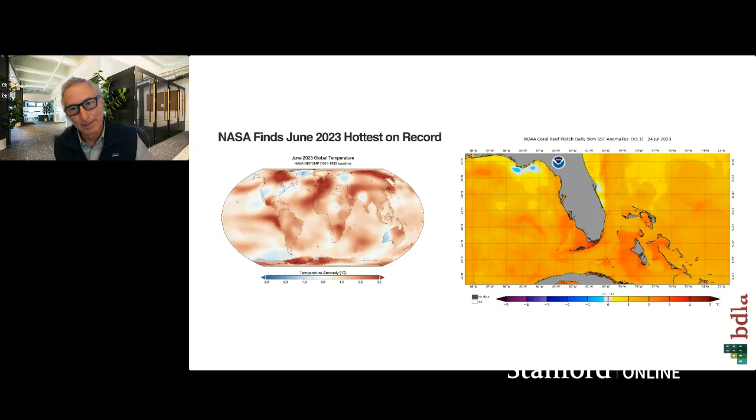The thing about building decarbonization, we all know why it's imperative that we start focusing on this. We're seeing a lot of evidence of climate change, some of it dramatic. But I think some of the other reasons why decarbonization matters is that air quality is impacted heavily by the use of fossil fuels. Particles, NOx, SOx, all these different things are part of air pollution caused by the use of fossil fuels.

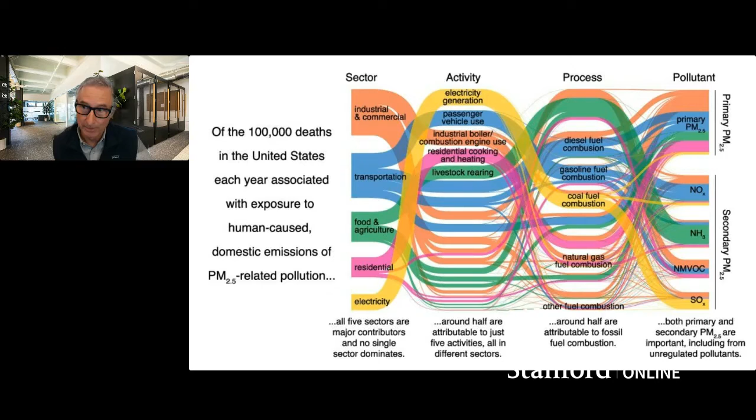The other thing to understand is that fossil fuels do disproportionately impact people of color. Black children in the US are 10 times more likely to get asthma than white children. Most of that has to do with fence line communities living near fossil fuel processing and extraction facilities.

I think the other thing that's really interesting is that the cost of our gas infrastructure is increasing rapidly. Right now, the spending on maintaining the gas infrastructure has gone up by 300% in the last 10 years, plus or minus, and that's only going to increase over time. Most of the gas infrastructure in the US is over 50 years old, much of it 100 years old, and it's going to cost a lot of money to keep that gas infrastructure going.

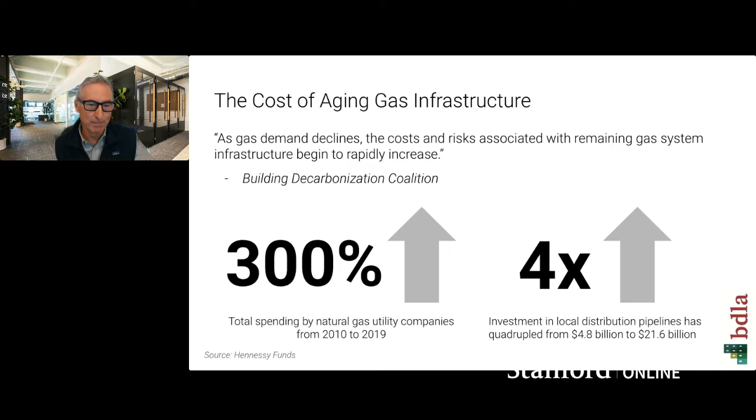So there's a lot of reasons that we should be talking about decarbonization. And I imagine many of you are part of the building industry, and we do play an important role. Buildings account for roughly 40% of greenhouse gas emissions globally, and the number in the US is also very similar. Within that, there's both the operational side and the construction side, and we'll talk about those.

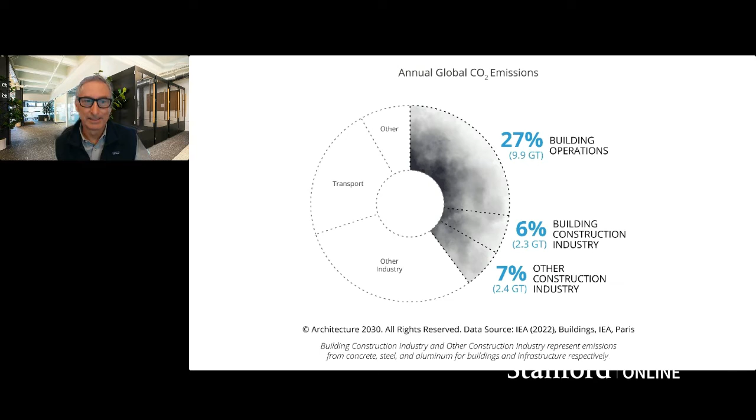I think the thing that's exciting and a challenge for all of us is there's a lot of legislation now being passed and a lot of activity that's changing how we think about buildings. New York City, for example, now has their Local Law 97 for buildings over 25,000 square feet. They have to meet energy efficiency and greenhouse gas emissions limits, and some of those are going to be somewhat strict when we get to 2030.

In California, there's a wide variety of legislation getting passed around this. I think one of the more important ones is SB 100, which says by 2045, 100% of electricity needs to be carbon free in California. It's also interesting that Texas is the state with the largest amount of renewable energy in the US, at 59 gigawatts and growing rapidly, and there's a variety of legislation happening in Texas as well.

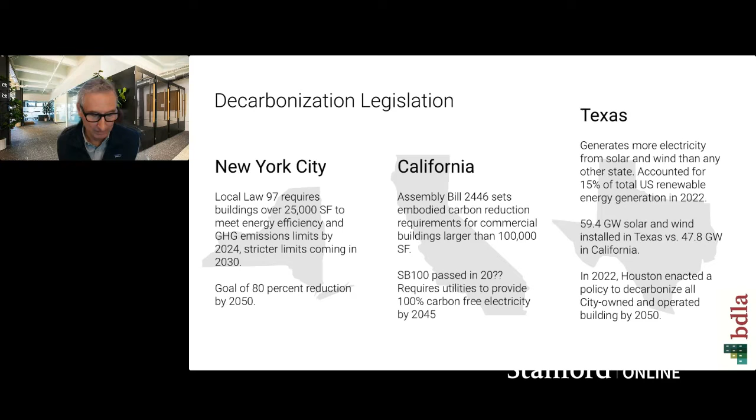There's also a variety of different things going on at the federal level, but I think the most significant is the Inflation Reduction Act, the IRA, and its impact on buildings as well as energy production. There are literally billions of dollars available now for clean energy, but there's also a lot of money that's going to be available for buildings. Much of that is in the residential sector for building energy efficiency and heat pumps, but a large amount of that money will also be impacting the commercial and industrial sector.

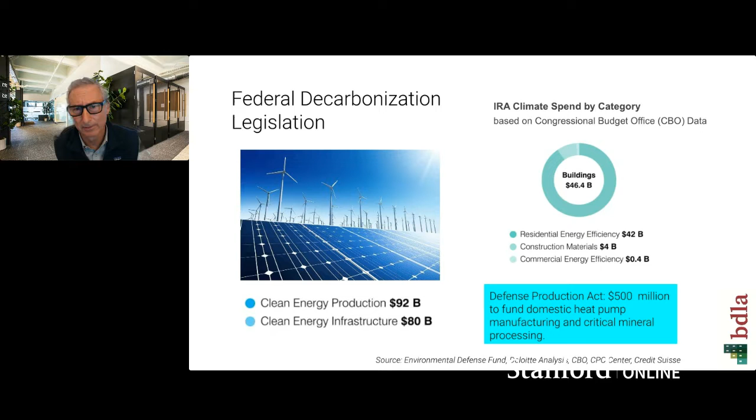Another interesting act that was passed that we don't hear about as much is the Defense Production Act, where $500 million has been put aside to fund domestic manufacturing of heat pumps and other critical minerals. I think that's going to change the availability of heat pumps very rapidly, and we'll be talking a little bit about heat pumps today.

So when we break down carbon emissions from buildings, there's two areas. One is embodied carbon, and we did have a seminar on that a couple of weeks ago where we dove into embodied carbon and how to decarbonize the construction of buildings.

The other side, and the larger side, is the operational carbon - the carbon emissions associated with using energy in buildings. There are two ways we use energy in buildings. One is that we burn natural gas at the building, primarily for heating needs - space heating, water heating, laundry - but there's also cooking.

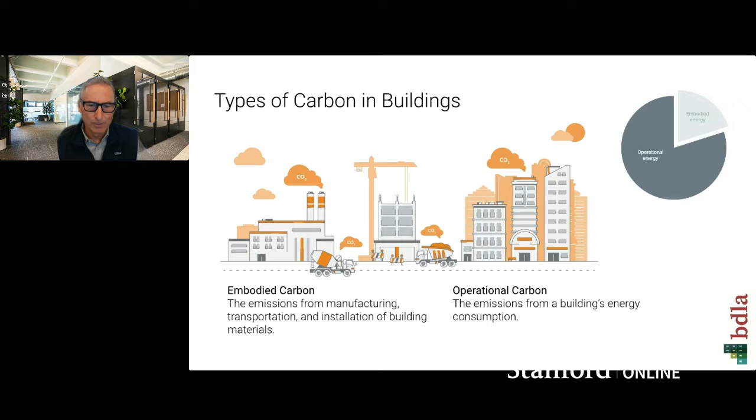So we're going to dive into operational carbon today. But before we do that, I wanted to remind everybody, for those who didn't attend the last seminar, that the path for embodied decarbonization, that is embodied carbon, is fairly clear.

We can start by reusing existing buildings and doing renovations instead of building new, remembering that embodied carbon is dominated by steel and concrete, or cement more directly. So reusing buildings is a really good thing where possible. In the US, that's a very doable thing.

The next step is choosing carbon sequestering materials where available. Wood is one of those that sequesters CO2 into the wood that goes into the building. And now there's this whole emerging area of mass timber buildings - we've worked on a variety of those, and it seems to be growing rapidly.

And then there's the option of specifying low carbon materials. A variety of manufacturers of everything from cement to steel are now offering low carbon materials. There's even a steel company in the US now offering what they say is carbon-free steel, made with electricity generated from renewable sources.

And then last but not least, for the remaining embodied carbon that we can't get down to zero, we can do different types of high-quality carbon offsets. I'll give an example of a project where that was done.

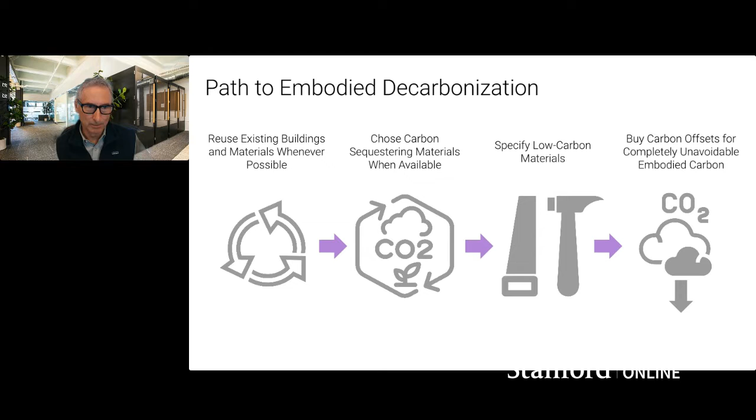On the operational side, operational decarbonization, the path is also clear, if anything more clear. If we take a typical building and start by making it more energy efficient, that's the first, and I'd argue the most important, step, and we'll talk about energy efficiency today. Then making that efficient building all-electric and finding electric ways to generate heat as the primary thing - I'll talk about that.

And then last but not least is to power that efficient, all-electric building with renewable energy, and that can be either on-site or off-site. So I'll give some examples of that.

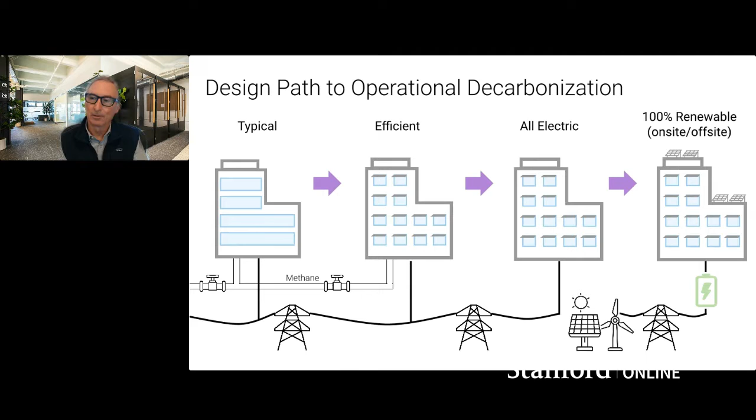In this quick time we have together, I wanted to share some of the energy efficiency blockbusters that have already made their way into the market. LED lighting is by far the most well-known. Some estimates have that reducing the need for several hundred power plants globally - the introduction of LED lighting has been super significant. It permeates all different building types.

But there's also the variable air volume box, which is a quiet but unsung hero in the HVAC world in commercial buildings. Before we had constant volume boxes, now we have variable volume boxes for delivering air. That's reduced heating and cooling energy in commercial buildings by at least 50%. There's also low emissivity glazing, which significantly reduces building envelope loads.

And I'd argue that the variable speed drive is potentially globally equally as important as LED lighting, though not a lot of people know about that. Variable speed drives impact buildings, but also factories and a variety of other industrial uses. So there are several, and there are other examples, of blockbusters on the energy efficiency side.

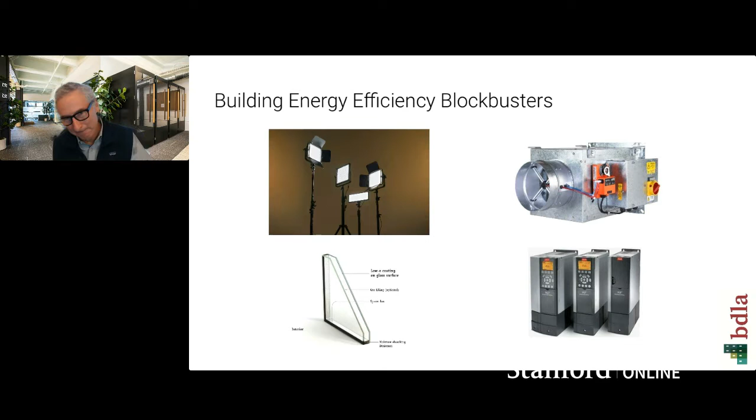If we look at the ASHRAE standard 90.1 for building energy efficiency, which is a recommended standard that many states use as their building energy code - when we started with that standard in the mid-1970s we pegged energy use at a relative value of 100, and we can look at the different versions of ASHRAE 90.1 over the years to where we are today. There's actually a new version that just came out.

We're seeing over 50% reduction in energy consumption, and this ASHRAE 90.1 standard is not that hard to meet with off-the-shelf technologies today. Most commercial buildings come very close to meeting it, and it doesn't take a lot of effort to get over the line. This is super significant. Not a lot of people understand that from the 70s to today, buildings are using half as much energy per square foot. It's a very, very big deal.

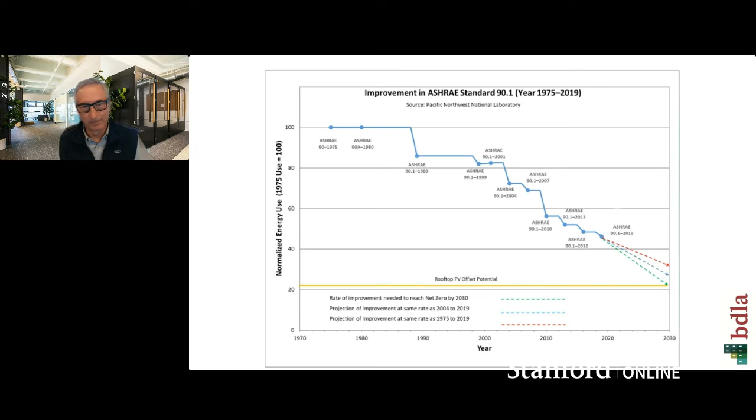What are the next generation of energy efficiency blockbusters? There are several, but my feeling is that heat pumps are really very much at the top of the list.

Using AI for energy optimization in buildings is something I think we're going to see a lot of over the next 10 or 20 years. Building control systems, be they small or large, are very much dumb building controls, or let's call them smart time clocks, but we could do so much more in buildings to optimize energy use.

Induction cooking is going to be very large, I'll talk about that for a minute. Integrative design, where we think more holistically about the design of energy efficiency in buildings, that's going to be important, and it is something that is growing. Personal comfort in buildings: the number one complaint of occupants in commercial buildings is too hot, too cold. I think we could do a lot for improving individual comfort in buildings, because everybody wants something a little bit different, and there are examples of that now emerging.

And it's somewhat connected to using AI. And then low pressure drop systems, one of the things that's near and dear to my heart, I'll mention that briefly.

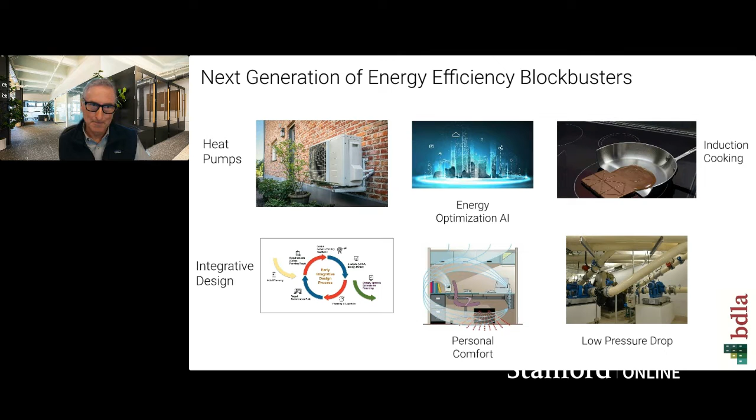If we put together all of the energy efficiency that I like to call state of the shelf, easily available but not commonly used, starting with the baseline building that meets the ASHRAE 90.1 standard, and put together a more energy efficient building envelope, better lighting, better daylighting, improved plug load, meaning things we plug in, better computers, better monitors, and low friction systems, meaning lower pressure drop ducts and pumps, and then put in a heat pump, we can get the energy consumption of a building down relatively easily by 40% plus or minus.

This building we modeled, and we've done it in a wide variety of climates—this particular one was in North Carolina. It was a 3 or 4 story building, and we covered 40% of the roof with photovoltaics, which brought the energy use down further and met a significant chunk of the energy needs of the building. Then we covered the building with 80% of the roof with photovoltaics, and that on an annual basis covered all of the energy consumption.

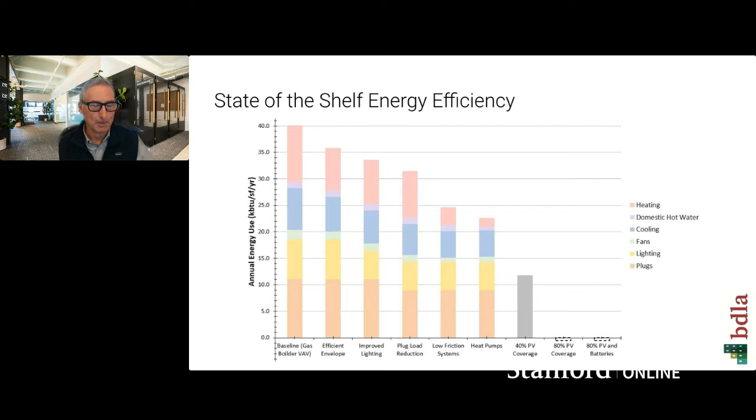And then I think the thing we're going to start seeing are batteries used in buildings. I think batteries are going to be another blockbuster that we're going to see widely deployed in buildings. So energy efficiency has a huge potential.

We move on to building electrification. Remember, the steps for decarbonization are: make the building efficient first, then electrify the building. The main tool we're going to have in electrifying buildings is heat pumps. The beauty of heat pumps is that for a gas heating system, we need to put in something like 105 or 110 units of gas to get 100 units of heat out—that's a good 90% efficient boiler. But for a heat pump, we can put 33 units of electricity in to get 100 units of heating out.

That's because heat pumps are able to pull heat from outside air, change the temperature, and deliver that as heat. The waste product of heat pumps for some buildings is actually beneficial—that is, it's cooling. So you can imagine a building where in the summer we're trying to make hot water for things like showers or laundry, and our waste product is cooling. We're working on buildings where—and Stanford's central plant actually has a system—when they need heating, they capture the cooling and use that, and vice versa: when they need cooling, they capture the heat and use that if there's simultaneous use. So heat pumps are very efficient and can provide a lot of benefits that gas boilers can't provide.

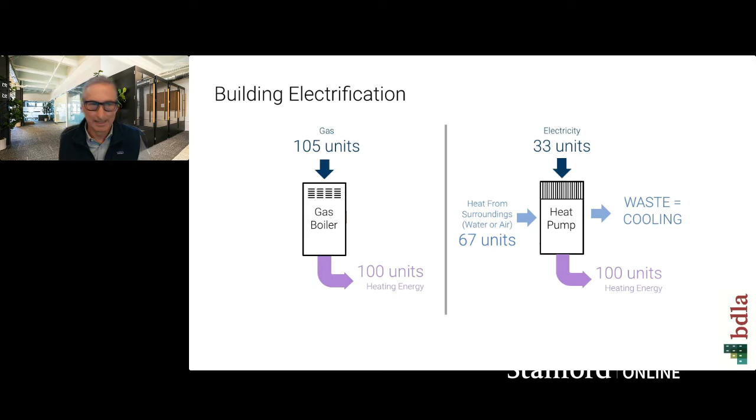The forecasts for heat pumps are that there's going to be very rapid growth in their use. This is already happening very rapidly right now in Europe, because they're transitioning away from natural gas for obvious reasons. But we're seeing a similar pickup in the use of heat pumps in the US. Heat pumps are not brand new, they've been around for quite some time. Combined heat pump air conditioners for residential use have been around for decades now, and I've seen that on houses all over the US. It's widely used, and the nice thing is you can get one piece of equipment that can provide both heating and cooling. So heat pumps are going to be a significant part of our future.

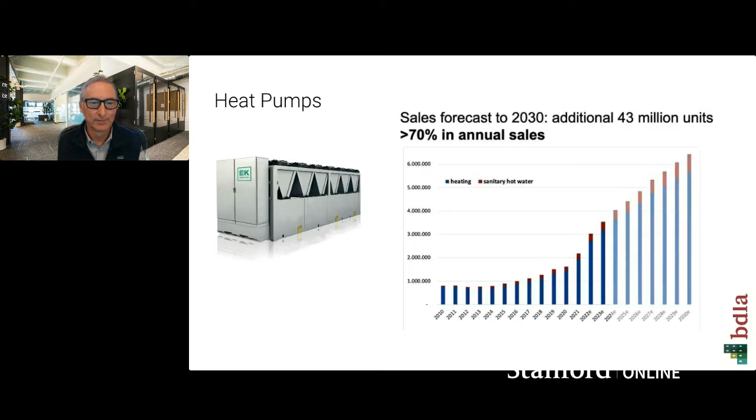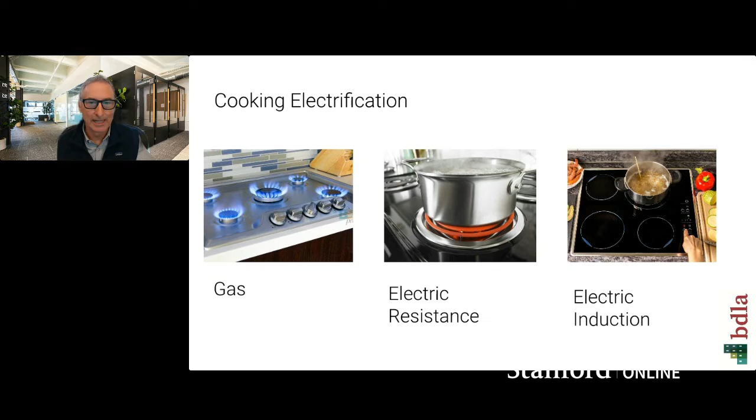Electric induction uses a magnetic field instead of heating a coil, and the magnetic field heats the pot only, not the surface. It's very rapid, boiling water faster than most gas stoves, and it's also very precise in going up and down. So electric induction is going to catch on, and we're seeing that starting to happen.

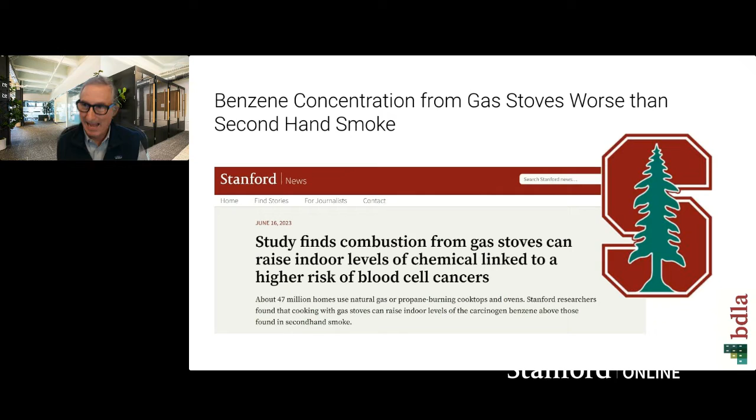One of the things about gas cooking that's coming out now is that the indoor air pollution from gas cooking is significant. A recent study by Stanford, in addition to other indoor air pollutants caused by using natural gas, found that benzene concentration from gas stoves is pretty bad in kitchens. This just came out earlier this year and was a fairly significant finding. They did a wide variety of tests on that.

So it's interesting, as we start to electrify homes—this is looking into the future, part of what we're doing at Stanford is trying to see how these things are going to go. We are anticipating that some homes will become electrified and others will still be using gas. And really the worst case scenario is if a house is electrified and the last thing they have is a gas stove.

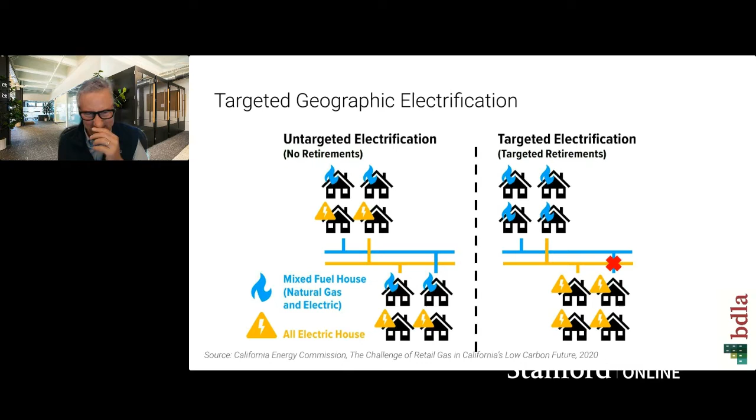So we have to maintain the gas infrastructure, the utility does, for very small use of gas. And what will happen is gas will start to become very expensive because the infrastructure is the same, but the use has gone down. So there is this idea of targeted electrification. If we can get a whole neighborhood to electrify, then in that neighborhood they can abandon the gas infrastructure and save all the money of maintaining that system.

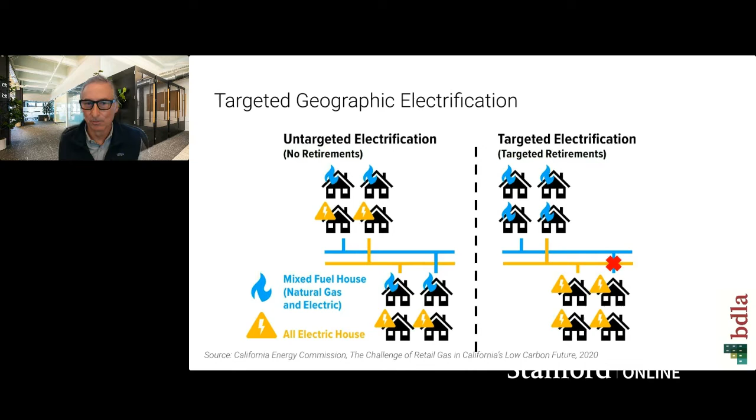So this is looking into the future. This is not something that's happening next year. But if you play this out over the next few decades, this is the kind of thing that we'll need to start thinking about.

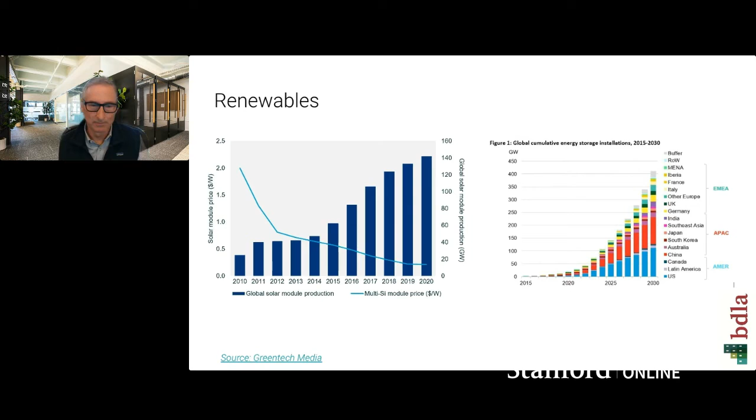Another thing to be aware of on this move towards renewables: 22 states have already put in place commitments, usually laws at the state level, saying that the grid needs to be 100% carbon-free by 2050 or sooner. As I mentioned, California has a target of 2045.

So there's a lot going on, and I just wanted to share with you a couple of different examples of these types of buildings. The RMI Innovation Center is one that's in Basalt, Colorado. It's a cold climate, gets very cold in the winter, lots of snow, but it's also sunny. So RMI spent some time thinking about this building: how can they make it a super efficient building? RMI is a nonprofit organization that works in the space of decarbonization—they've been doing that for many years.

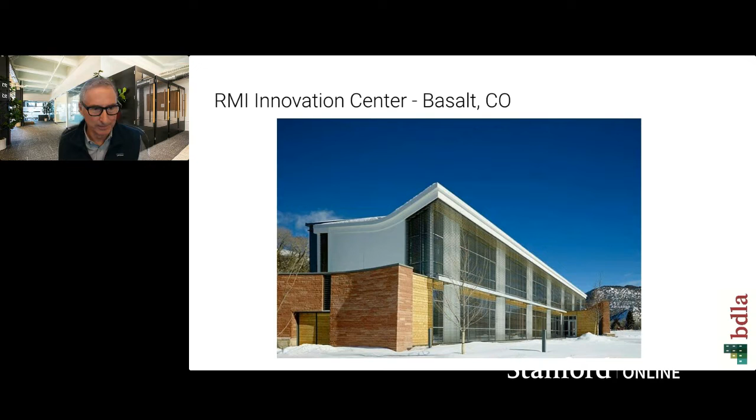So they started thinking, okay, we're going to put in really good windows. These are super windows that have very high insulating qualities, and they let a lot of daylight into the space—you can see it here. This is the south side of the building. They've set it up so that when the sun comes in, it hits the floor and heats it up in the winter months, but does not shine directly on the desks, so the desks aren't right up at the window. So they get the daylight, they get the passive solar gain, and they get a highly insulated building at the same time.

They even have chairs that provide individual comfort through heating and cooling, heating and then fan ventilation on the chairs, so that people can get to the comfort that they want.

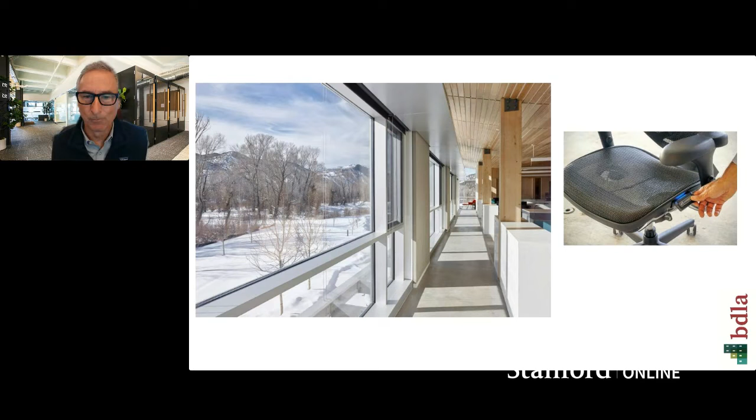The interesting thing is that they also insulated the building envelope, the non-glass parts, very highly, and that allowed them to eliminate the expense of what they initially planned: a big ground source heat pump system.

All they needed was a heat recovery ventilator and the equivalent of 6 hair dryers of electric heating, so they put in some small electric baseboards. It's a 15,000 square foot building, so that's a very small amount of heat. It's not a heat pump, but it was so little of it that it made sense.

So this is integrative design. Overall, the building costs less than what it would have cost if they put in the heat pump.

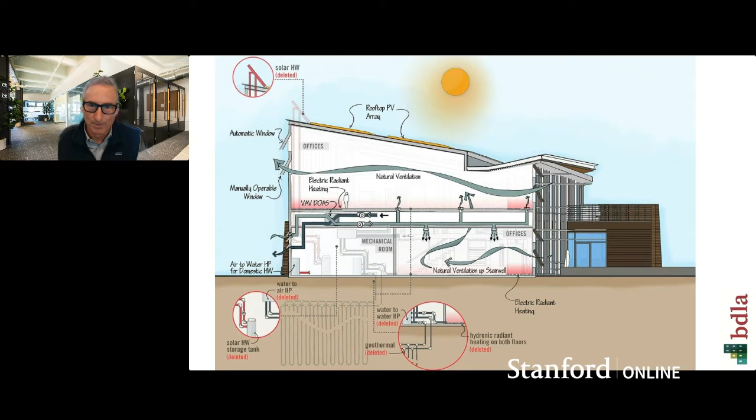Another project I'm working on currently, under construction, is the American Institute of Architects headquarters in Washington, D.C., a few blocks from the White House. It's a building that was built in the 70s, and at that time, building insulation and good quality windows were not a thing, and heating and cooling systems were not done in a very energy efficient way.

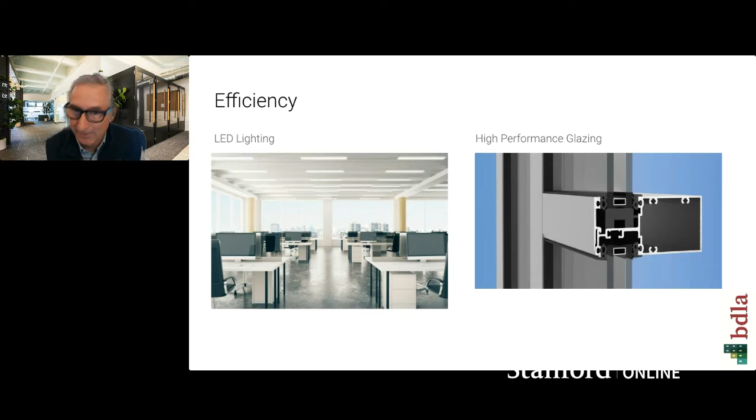So what they're going to do is replace the lighting with LED instead of inefficient older fluorescent lighting, with better fixtures, and set the building up for better daylighting. Instead of really dark glass, they're going to put in lighter glass that transmits more daylight, along with new double glazing, low emissivity glazing that lets light in but blocks heat out in the summer months.

And they are going to electrify the building. They're taking out the natural gas boilers that make steam, and putting heat pumps on the roof to make the hot water instead.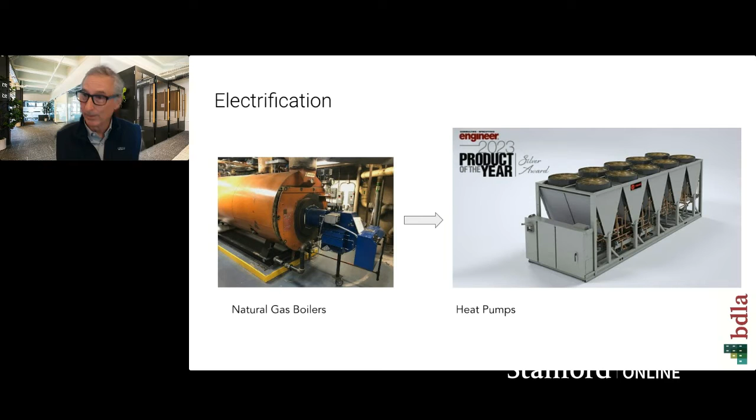With the reduction of load from the lighting system and the building envelope improvements, even though they're adding all this new electric load in the heat pumps, they don't need to upsize the electric service to the building. So they are going to put some solar photovoltaics on the roof.

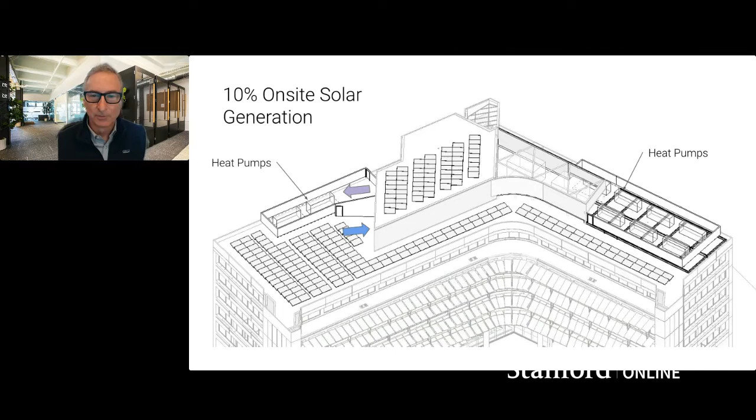This is a 7-story building, and the rooftop solar is only going to amount to about 10% of the annual use. So they're going to purchase off-site renewably generated electricity through the Pepco DC Power Connect program, where you can select your generation provider, and there are a few options with 100% renewable, a combination of wind and solar.

The one they're using is called Clean Choice Energy. So at least the part of their bill that goes to generation will go to renewable energy. They'll have on-site 10%, off-site 90% renewable electricity for now, as an all-electric building.

The interesting thing about the embodied carbon of this building is that reusing it instead of building new is saving 76% of the embodied carbon. So you can see that's the biggest step, just avoiding that embodied carbon by reusing buildings.

The next step is offsetting the remaining embodied carbon, which has a lot to do with the windows they're purchasing, furniture, carpet, all the stuff going inside the building, plus some steel structural upgrades and things like that.

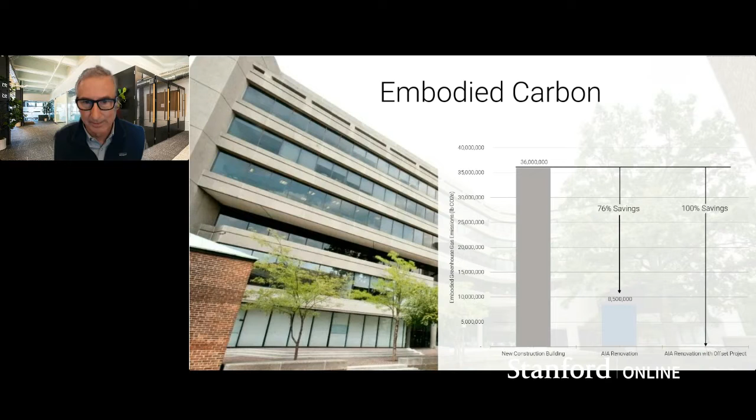So what they're doing is they've purchased solar panels and donated them to Habitat for Humanity, who will install them on low-income homes in DC and Northern Virginia. Those panels will avoid electricity consumption from the average grid, which has coal and natural gas in it, avoiding carbon equivalent to the embodied carbon of the new materials they're bringing to the site.

I think that's a very creative way of doing an offset. Obviously, you don't have to do it in such a deliberate way—there are offsets you can buy where people group them together, and it's important to get high quality offsets.

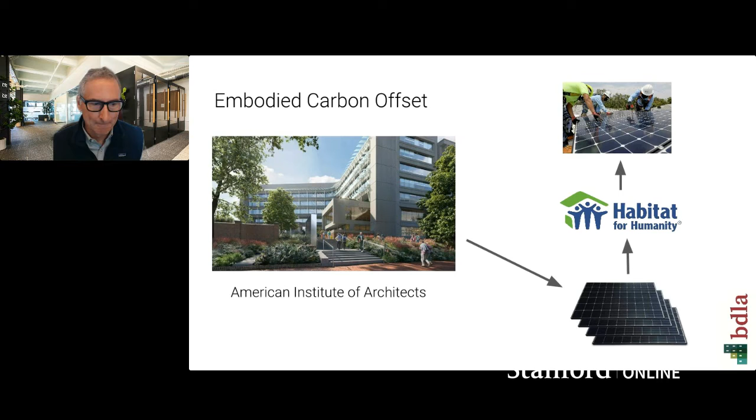I'd say that this kind of offset is as high quality as you can get. I've worked a lot with a company in India called Infosys, and they are collaborators with Stanford. They have 30 million square feet of offices throughout the country and 250,000 employees, so it's quite a large footprint as far as buildings.

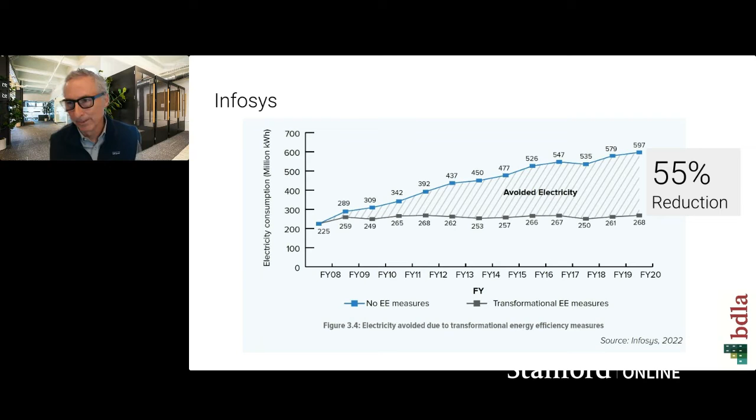They embarked about 10 years ago on a program to make much more efficient buildings, and then to go back to their existing buildings and retrofit them. Overall, over that period, they've reduced their electricity consumption per employee by 55%. I think it's probably the largest corporate energy efficiency program that's ever happened. And I think it's important to note that large energy efficiency improvements are possible in buildings. One of my colleagues at Stanford, Jim Sweeney, wrote a book.

It was based on research he did with his graduate students and postdocs over a 5-year period. They looked at energy consumption in the US, all sectors, and said, based on the efficiency that was available at the time in the earlier periods in the 70s when the oil crisis happened, compare that to where we are today. How much fuel is consumed on an airplane per passenger mile over time? What about industrial production? How much energy, embodied energy, is in a car? Or they looked at buildings. So they looked at a wide variety of sectors in the US.

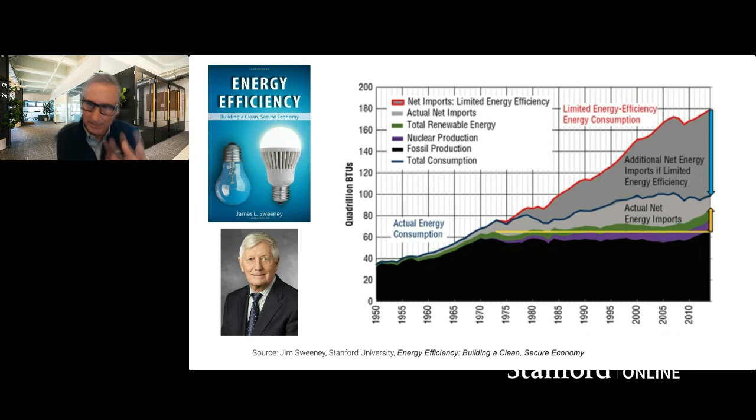What they found was energy efficiency over the period from mid-70s until 2015 had provided more energy reduction than all of the new energy sources, domestic ones, combined. They were looking at nuclear power, renewables - all these things were small compared to the gains from energy efficiency. So for that reason, I am very much a proponent of decarbonization that's going to happen with energy efficiency.

So I'm going to wrap up now so we can have some discussion. The key takeaways from this is that decarbonization is emerging rapidly for most clients in most markets. I'd say some of it's being driven by legislation and such, but some of it's just being driven by what the clients want. And then ultimately energy efficiency makes economic sense. So there's a wide variety of reasons that people are moving this direction.

Heat pumps are rapidly evolving as the demand for them surges. And I, as a person who works in the design of buildings - where for commercial systems 3 or 4 years ago, there was maybe 3 viable options in each category on commercial building heat pumps - now I'm seeing today that number be closer to 10. I'm seeing a lot of people calling me and saying, look, we've got some new stuff coming out. I think that number will be more like 15, or by 2030, more like 20 plus options in each category.

I think one of the more telling things was when I was at the national conference for building heating and cooling systems, the ASHRAE conference, one of the oldest boiler companies in America had a huge display right at the center of their booth at that show with a heat pump - their first heat pump. So that was encouraging and significant.

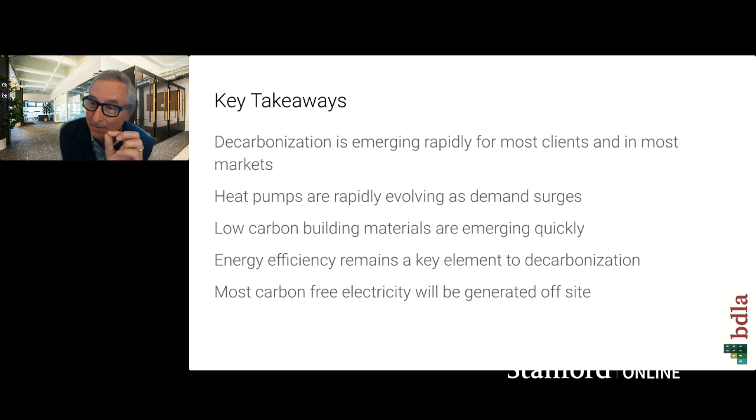So the thing to understand about gas appliances is that for safety reasons, all of the modern gas appliances - not the old ones, but the new ones - require electricity to operate. A gas furnace doesn't work without electricity. Gas stoves, the newer ones that are like 15 years and less, require electricity. They have the interlock so that you can't use the gas when the electricity is not available.

So gas is also vulnerable. This electric vulnerability can be offset with storage, as the questioner mentioned, and that storage will be available not only at the utility level but also in a distributed way. So I think we're going to see more and more storage, and solar distributed - another reason why distributed solar is a good thing. So I think there's ways that we can make the electric grid more reliable, and that's fairly obvious.

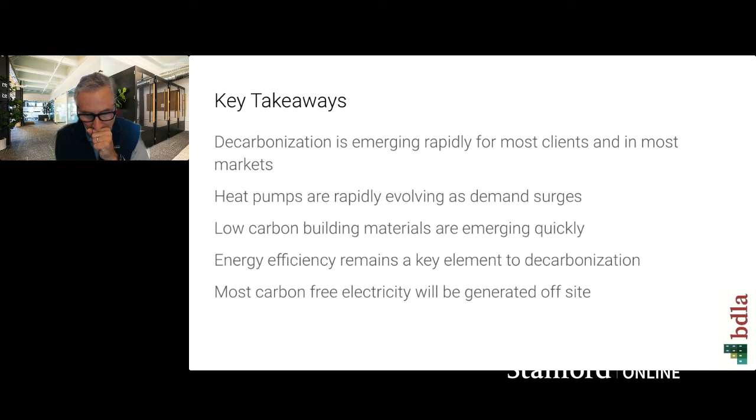As far as hydrogen is concerned, we will see a lot of hydrogen in the future. There's no doubt hydrogen will be critical in industrial processes. There's a lot of industrial processes that just need heat, and we can't get exactly what we need with electricity, and it will be more affordable to do with hydrogen generated with renewable power. So a wide variety of technologies are being investigated in industrial processes where hydrogen becomes the key thing. There's a lot of discussion about using hydrogen in long distance trucking, for example, is another area.

And there is discussion about using hydrogen in homes, and there's been different research projects and tests of that. A lot of people are saying that's going to be a tough sell in homes compared to electricity. We can't use existing gas pipes with 100% hydrogen. You can use 10% hydrogen, but if you get above that, the hydrogen starts to decay existing piping that we use.

The steel pipes and the different PVC pipes that we use for gas don't work with hydrogen - you have to have a new pipe material. So putting in new hydrogen infrastructure is probably going to be, in most areas for homes, more expensive than just electrifying. So hydrogen is part of our future, but the jury is out on how big of a role it will play.